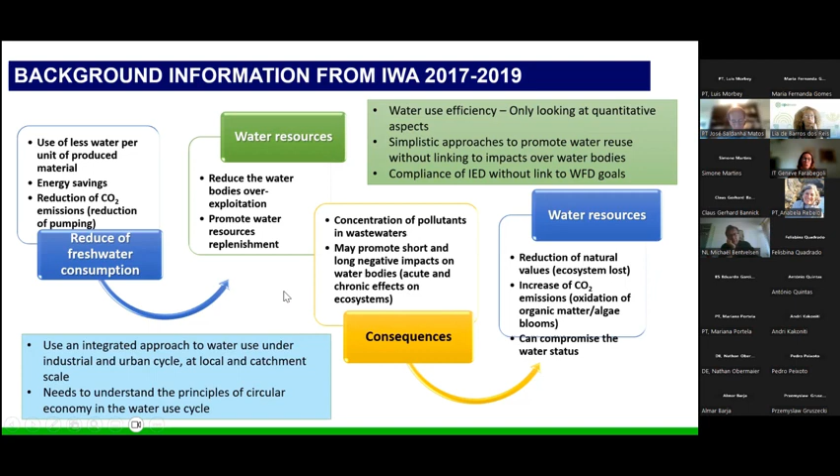So we tried to understand this principle of circular economy, and we tried to focus on water circularity with another approach, not the classic approach focused on water use efficiency and quantitative aspects only, through reduction of consumption and losses, rainwater recovery, for example, or the use of sludge from wastewater treatment plants as a source of organic matter and nutrients and for energy production.

But we tried to take a different, integrated approach to achieve a real transition, because both factors cannot be seen as individual indicators, but should be linked with several possible processes. So water has to be seen as a service, a source of energy, and a carrier.

So what we have done is try to develop this index that can measure the efforts of an installation or a process to move towards circularity. And how to develop this index was the first question.

So in a way that could be smart criteria, we tried to consider key factors, some easy, accessible, and measurable factors that can take into account the relationship between water use patterns, process, and environment. SMART criteria: S for specific, M for measurable, A for achievable, R for relevant, and T for time bound. So especially we tried to develop this index to be easy, measurable, and consistent with available data, closely connected with inputs, output, and outcome, and especially with a specific time frame.

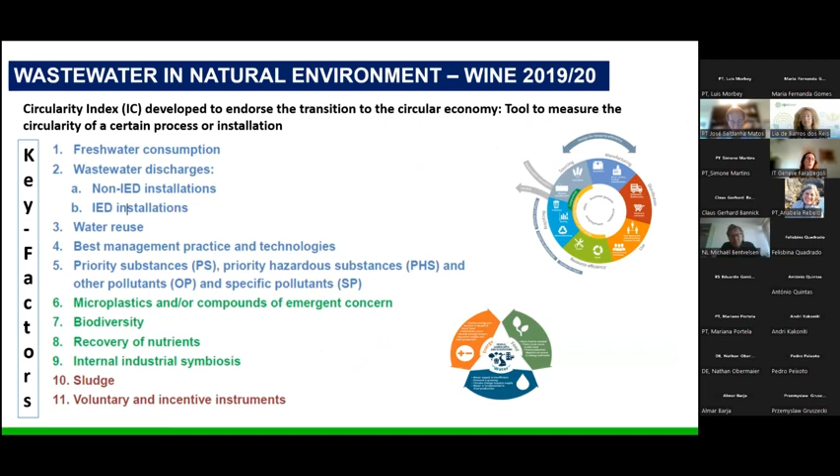For example, the first one, freshwater consumption, or the third one, water reuse, or the sixth or seventh, biodiversity. Here you can see in each part of this cycle that can start wherever, from wastewater treatment to water reuse, for water treatment according to urban use, agriculture, industry use, wastewater, and so on.

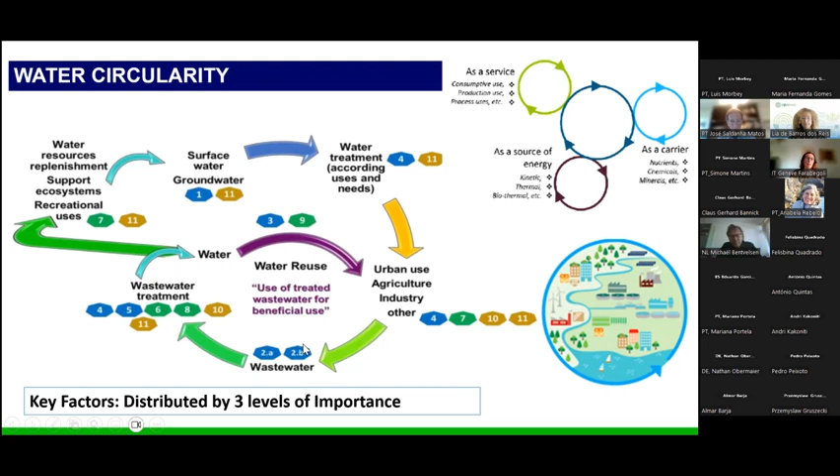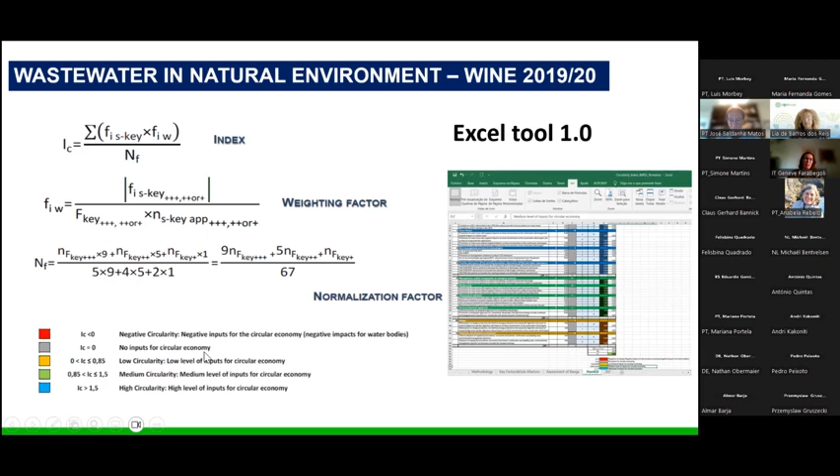If you obtain it, there is a scale of color, very simple to understand. If you obtain a negative circularity, you get a red color index, so negative inputs for the circular economy - you have to improve, of course. If you have, for example, the orange color, you have low circularity, and green is medium, and blue is high circularity. So for IC, the circularity index is below 0 for negative, from 0 to 0.85 for low, from 0.85 to 1.5 for medium, and then high circularity for above 1.5. So which are these key factors?

You have already seen the key factors, but we also decided to consider the sub-key factors and their impacts, which can be positive or negative. So for each key factor, there is a value: 9 for the high importance key factor, 5 for medium, and 1 for low importance key factor.

And for each sub-key factor, here you can see the different values that could be positive or negative according to the impacts. For example, just to look at one of them, freshwater consumption: if you have measures in place to reduce consumption, but without linking the impacts on the quality of wastewater, or it contributes directly to its degradation, the impact should be negative. But if you have measures to reduce consumption with the possibility to reduce the effects of effluent concentration, that's positive - you have a positive impact.

So here we consider, for IED or non-IED installations, all these key factors - microplastics, biodiversity, recovery of nutrients, but also sludge and voluntary incentive instruments such as Ecolabel, for example, certification.

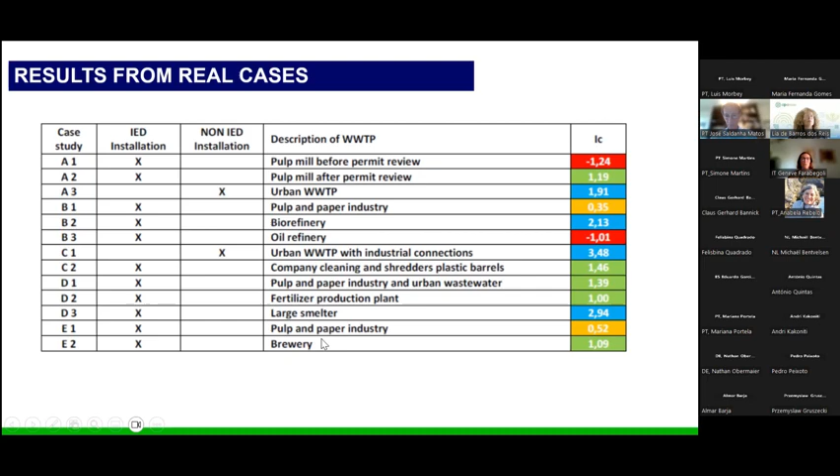So we have got a lot of results from this application of the circularity index, and especially if you see the water circularity index and the urban wastewater treatment plant, applying this index we can understand some important interlinks, such as the compliance of emission limit values defined according to the Water Framework Directive principles. That is very important, not just simple flat values defined by current legislation - that is also the case in Italy, unfortunately.

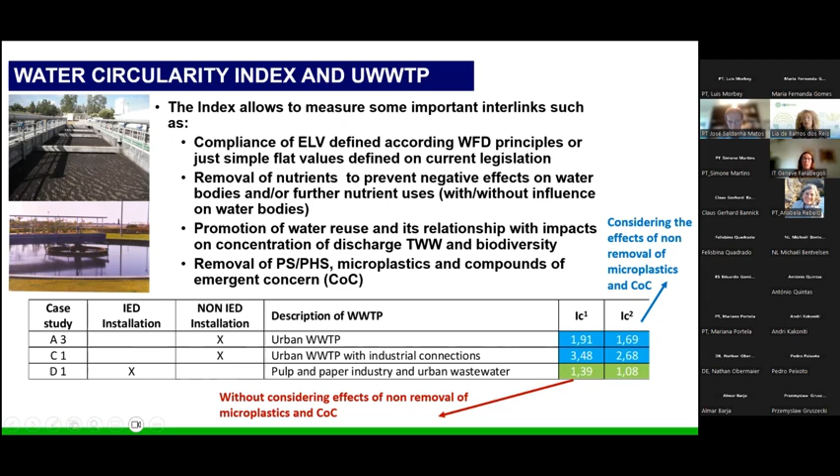Also the importance of the removal of nutrients to prevent negative effects on water bodies, and promotion of water reuse and its relationship with impacts on concentration of discharge. Considering the urban wastewater treatment plant, we also tried to see the effect of considering the removal of microplastics and compounds of emergent concern. We noticed that the circularity index didn't change a lot, just a little bit lower, but not so much. So in this way, we could assess the main positive and negative key factors and impacts of the application of the circularity index.

We noticed that if you have emission limit value compliance according to the Water Framework Directive, you have a positive impact. If you have promotion of water reuse with positive impacts on biodiversity, that's positive, but if you have promotion of water reuse with negative impacts on final concentration due to, for example, concentration of the discharge, you have a negative impact.

So in this way, we moved during the last phase of this project to try to apply this circularity index to different kinds of facilities, moving from the production to the product, from installations to some regional local activities. We focused on three different kinds of activities: a critical activity, as mentioned before, such as a refinery or a pulp and paper mill; regional local activities that could have significant impact in terms of water use, for example a seasonal activity with high discharge loads and high water consumption; and a food production activity that uses or intends to use treated wastewater for irrigation or sludge.

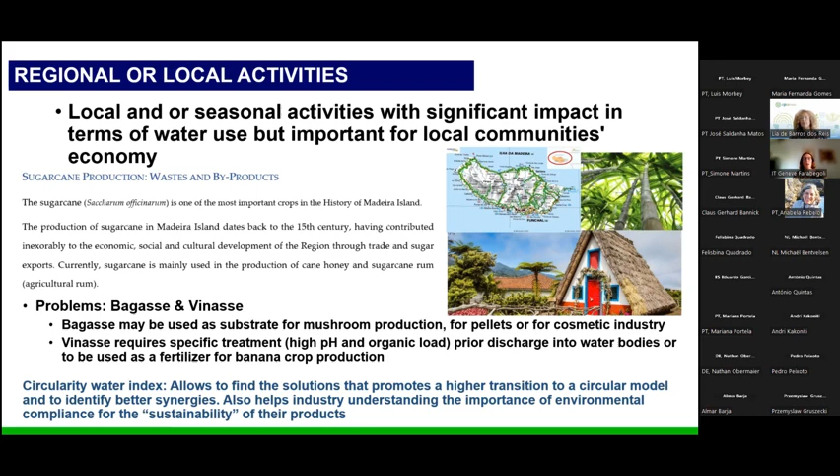So we tried to use this circularity water index to find solutions that can promote transition to a circular model, and to identify synergies, and try to help the industry understand the importance of environmental compliance for the sustainability of their products. The second site visit, we did in Murcia, Spain, and it was about the use of urban wastewater for crop irrigation.

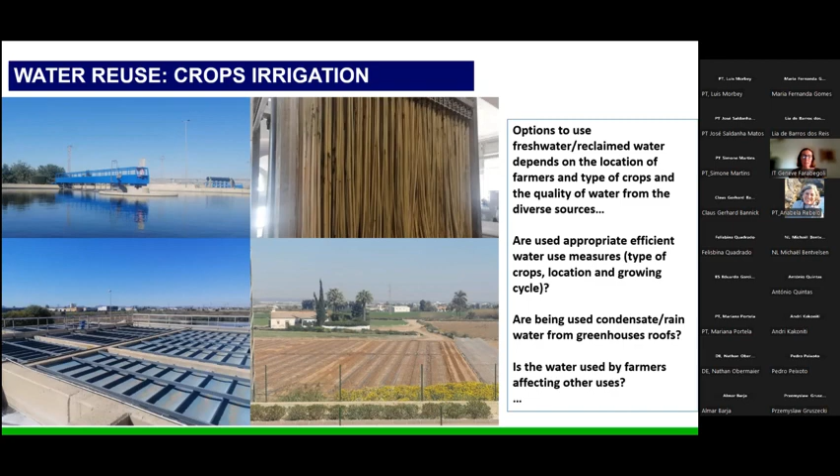So the final remarks of this project are that the index allows the assessment of the impact of the integrated approach to water use, and it confirms the promotion of water circularity depends on the management option chosen. The application to IED or non-IED installations and water reuse solutions enables the cumulative impact of efficient water use to be assessed both in terms of quality and quantity.

So this index can, or should be, refined to include some energy aspects and further integrate impacts on CO2 emissions. That's an aspect we have to focus on a little bit more. But the definition of factors applicable at the final product level could support the adoption of best practice in water use, with relevance to regional and seasonal products, as we have seen in the case of Madeira. This can be considered an indicator that promotes integrated compliance with environmental legislation.

For more information about this project, you can see the link to the IMPAL website, where you can download all the reports available, in English, Italian, and also Portuguese. So this was our last question: can this index become a label? We don't know. Let's see. Thank you for your attention.

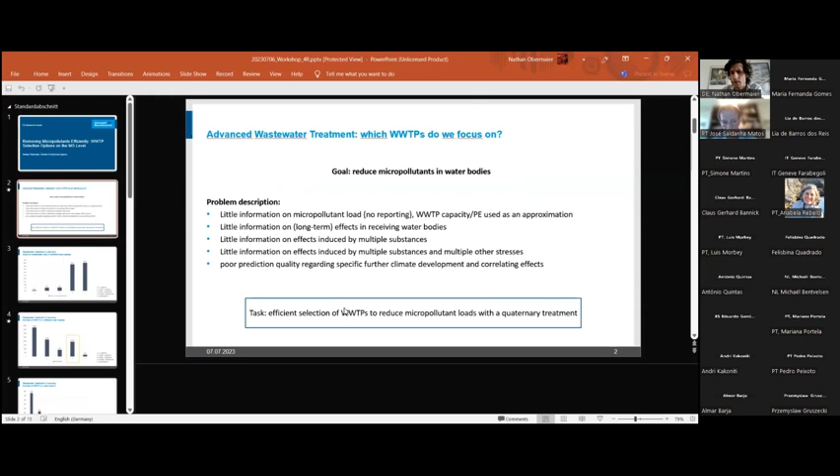Do you see the new slide now or still the old one? It's the old one still. Okay, can you put it in slideshow mode? Maybe it's better. No, it's not better. I'm just going to share my whole screen, I think that usually solves the issue. Okay, if I switch now, do you see it? Yes, now it's okay, it's good. So okay, now it's good. Yeah, we got that sorted out.

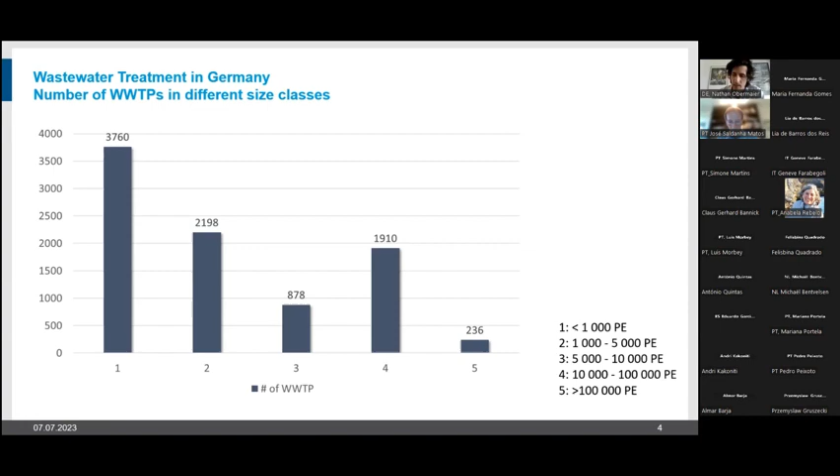If you come back to the question, which wastewater treatment plants do we focus on? We, the German Environment Agency, published a position paper in 2015 where we stated it would be good to equip all wastewater treatment plants with more than 100,000 PE with a quaternary treatment, and also plants that discharge into sensitive water bodies. In our definition, sensitive water bodies were water bodies also used for different purposes, like bathing water, drinking water, irrigation, and so on. So that was our proposition in 2015.

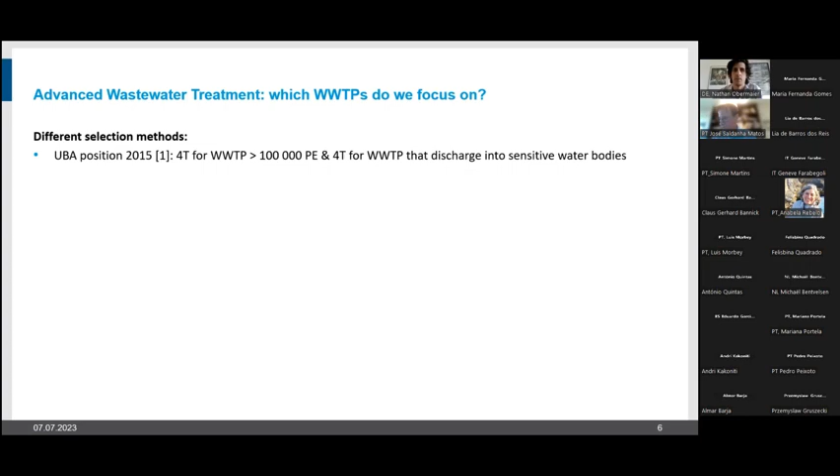In 2016 in Germany there was the start of the so-called trace substance dialogue, which is basically a synonym for micropollutants in Germany. They developed a guideline in 2019 on how to identify the most relevant plants that should be equipped with a quaternary treatment. We now have the National Water Strategy, a strategy of the German government that continues this trace substance dialogue, with equipping additional wastewater treatment plants with quaternary treatment as one of its measures. It should be added that in Germany we already have around 40 to 50 plants equipped with a quaternary treatment, so we are already heading in that direction.

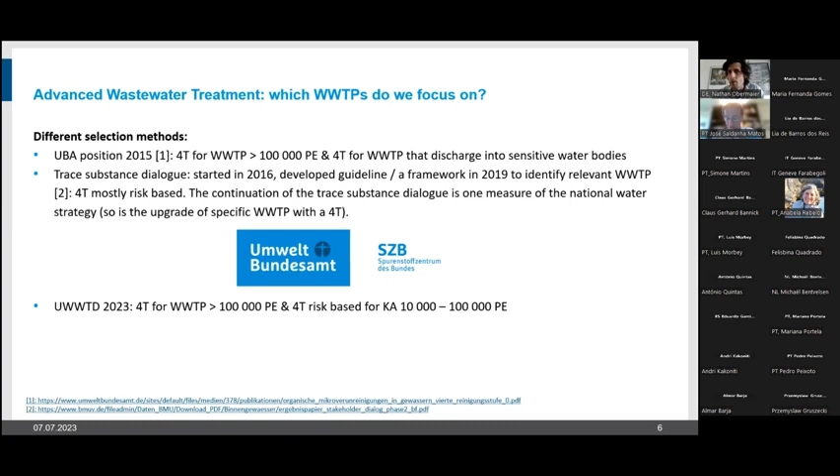The proposal of the European Commission stated that we need quaternary treatment for all plants over 100,000 PE, and a risk-based assessment for plants between 10,000 and 100,000 PE. So just to give you a quick look at the guideline, because I think it's important to realize how we select plants and how that approach looks - we also had that introduction that we need a multi-criteria analysis, and we have that risk aspect.

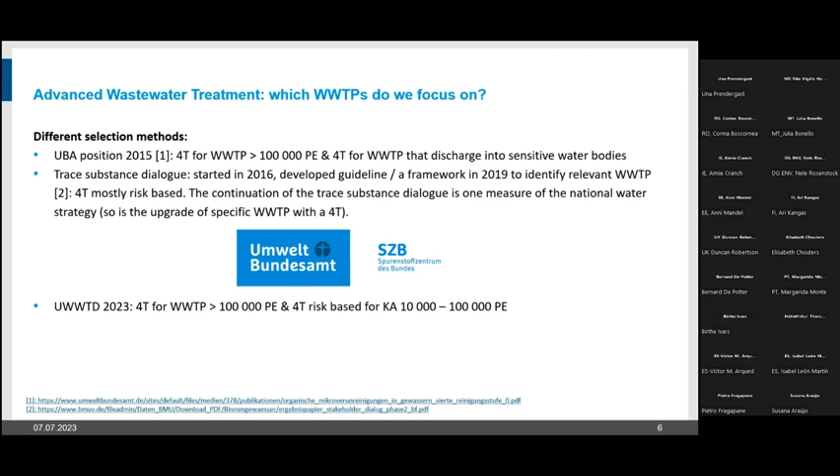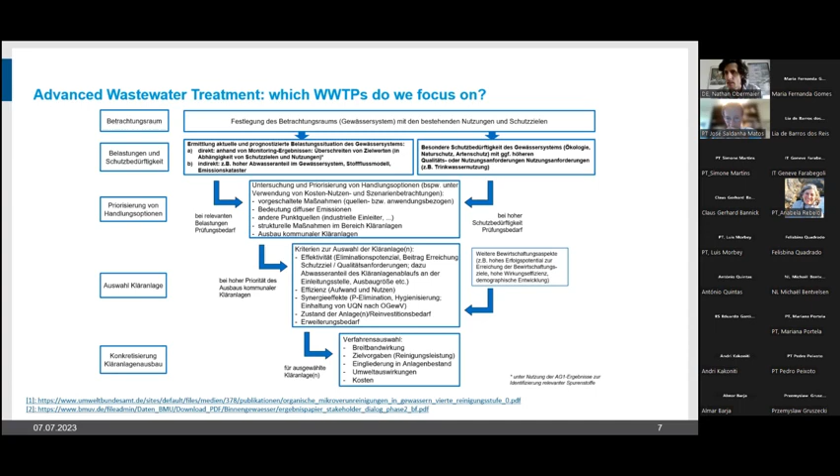So I thought it would be a good idea to show it quickly how it looks. It's unfortunately in German, but if you have any detailed questions, we can try to give you a more detailed translation.

I basically translated the key points on how to assess which plants to equip with a quaternary treatment. This all starts with the scope, where you define the water body you want to select, and you set goals for that water body based on its use. For example, we have one goal for the River Rhine: reduction of micropollutants by 30% until 2040.

Next, you assess the pollution stress and the vulnerability. This is doable in various ways. You can directly measure the pollution stress, or indirectly model it, or do a combination of both, verifying your models with measurements. If you look at vulnerability, you have ecology, drinking water abstraction, bathing water, irrigation, the ones I've mentioned before.

The next step is to prioritize measures. We have scenarios, cost-benefit analyses, and we check what kind of pollution we have—if it's a diffuse source or a point source, and if measures on wastewater treatment plants are helpful or not.

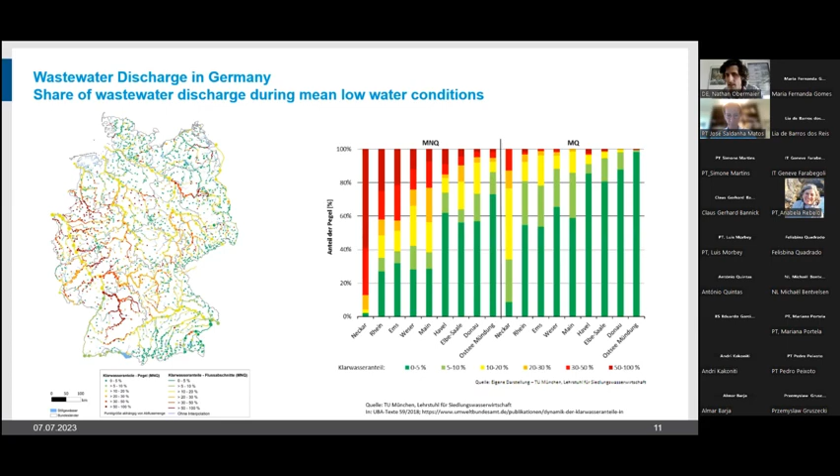So we know we have several rivers where the share of wastewater during mean low water conditions is above 50%, and some measuring stations where it's higher than 90%—so almost all the river is treated wastewater. That, of course, influences how important quaternary treatment will be, and it influences the selection process, as it's a key criteria for selecting plants. I've posted it here again for the different river basins and systems in Germany.

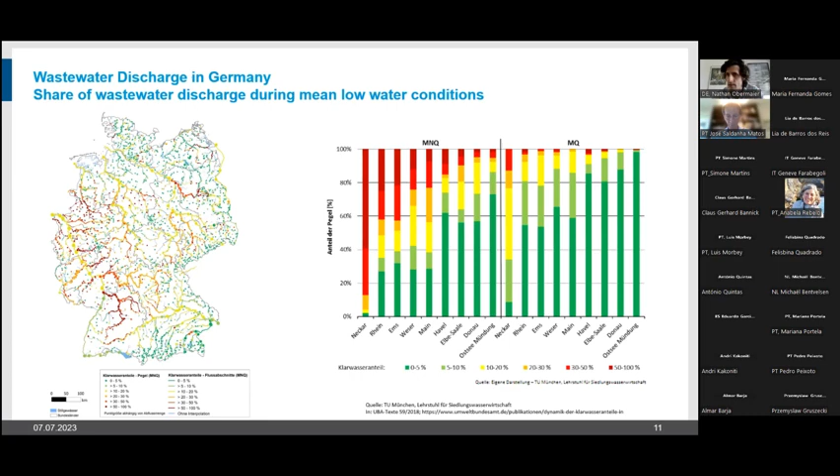You can see that it's not just a single case, but almost in every river you have these spots where the river is more wastewater than natural river water. And we also have this time effect.

Here's an example for the River Rhine, where under medium conditions it basically always looks good. You have some points where the share of wastewater is between 20 and 30%, but that really deteriorates during mean low water conditions, where you can see that almost a lot of stations have at least 20 to 30%. So that's quite important to consider if you make a risk assessment, that dilution cannot be based on mean values. You have to take into consideration the mean low water conditions and what's also coming from upstream.

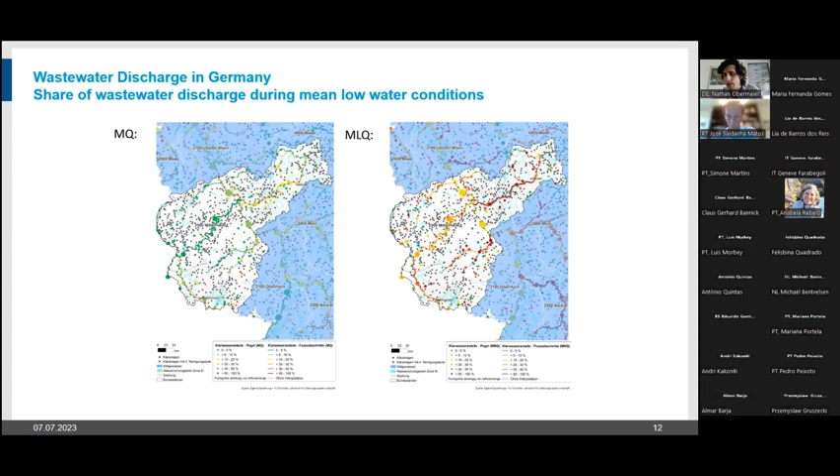So those are really, really difficult assessments you have to take.

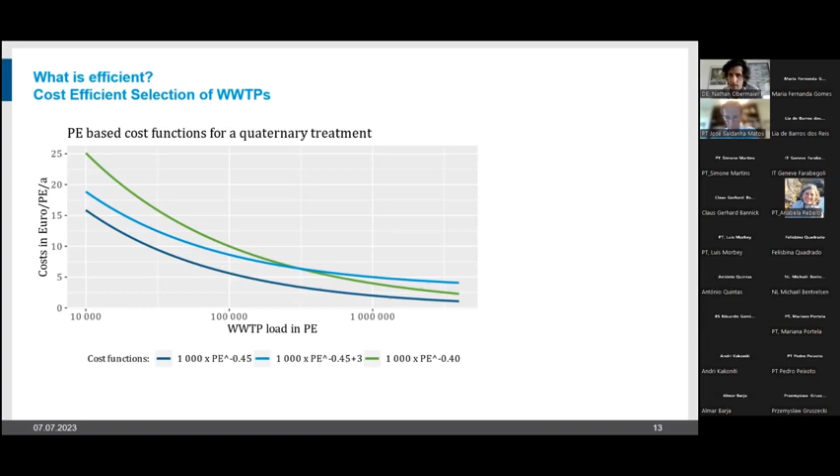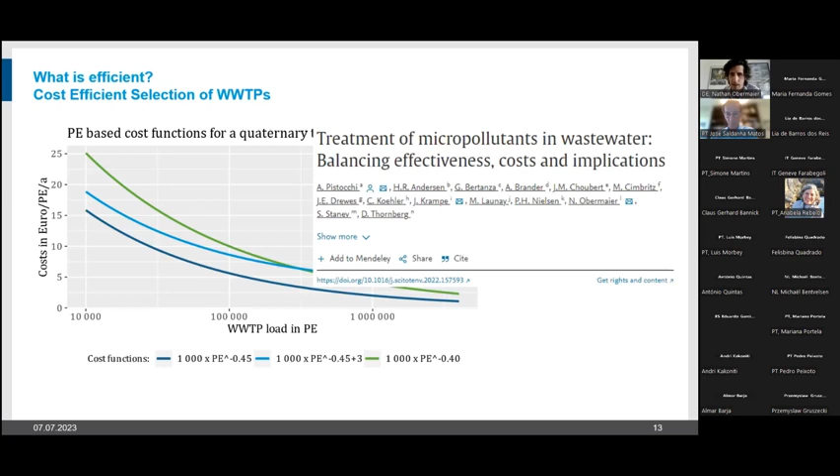The next slide goes into the efficiency criteria, where we have cost functions for quaternary treatment that we also presented in the scientific opinion paper the German Environment Agency wrote on the Urban Wastewater Treatment Directive recast, which shows that the bigger the wastewater treatment plants get, the cheaper it is per capita. If you want to know more about how to derive those curves, I recommend reading the paper, which has a really deep methodical approach. The data certainly has some years now, and due to rising energy prices it might be a bit more expensive now, but nevertheless I think it's quite a good way.

This brings me to the summary and conclusion, and hopefully to a good discussion, where we state that quaternary treatment is mandatory to reduce micropollutant loads, and we need it as a multi-barrier concept. With respect to efficiency, it's certainly quite hard to define if you have to look at several different aspects.

You for sure need a good multi-criteria analysis, you need scenarios, you need modeling, you have to combine them with measurements to be precise. And there are a lot of really high uncertainties with respect to risks. We rather see a risk-based approach as a really complex tool.

And we are happy that there are plans that should introduce a quaternary wastewater treatment step without having to do a risk-based assessment. Last but not least, I want to give a quick commercial break to the scientific opinion paper that I've already mentioned. We wrote it and it discusses more aspects of the Urban Wastewater Treatment Directive in detail.

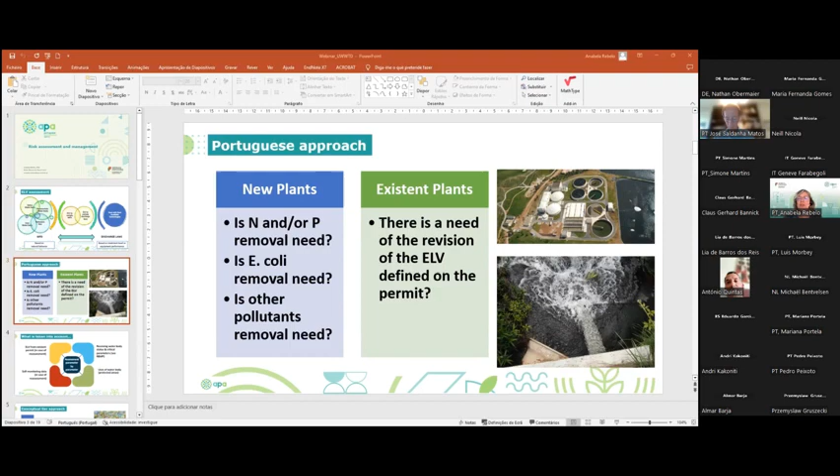For example, for the Industrial Emissions Directive, sometimes we have to go deeper than the associated emission limit values - we've already noticed this need.

So what is taken into account? It's an assessment permit by permit. If we're talking about a reassessment, we look at the permit and all the data we have from self-monitoring, and also data from the water bodies. We look at the receiving water bodies and the critical parameters for their status, their uses, and the classification of those areas as protected areas under WFD.

So basically, we use a conceptual tier approach - it's not modeling, just conceptual models. We look at the hazards, which are the pollutants that may be in the wastewaters, then we look at the vulnerability of the receiving water bodies - their susceptibility to pollution - and finally the damage. If I have that damage and susceptibility to pollution, I have the consequence. The consequence versus the hazard gives me a risk.

So basically, I use this kind of methodology to define appropriate emission limit values, measures for the self-monitoring program, and also for compliance assessment. The self-monitoring may include water body monitoring.

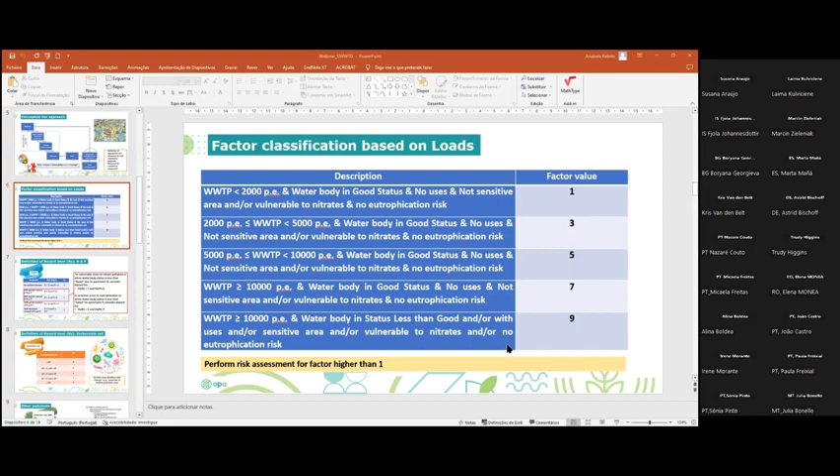We started with the hazards, and for the hazards, we use proposed emission limit values as input data. For example, for nitrogen and phosphorus, we use the emission limit values from the current Urban Wastewater Treatment Directive, and also from national law, for discharges into dams or fresh waters that feed dams.

In that case, we will have a classification from 1 to 9, a scale of importance. 1 is minor importance, 9 is absolute importance.

And basically, to establish nitrogen and phosphorus values, we take into account not only the status, but also the vulnerability to pollution, to nitrates, and the status - whether it's good or less than good - due to nitrogen and/or phosphorus.

Then another type of parameter is Escherichia coli. Why? We have a lot of bathing waters, but we also have a lot of shellfish waters - we are large producers of clams. So we have this classification under criterion C, under the directive.

In this case, it's always a case by case assessment according to member state rules, so we define the Escherichia coli emission limit values based on this approach.

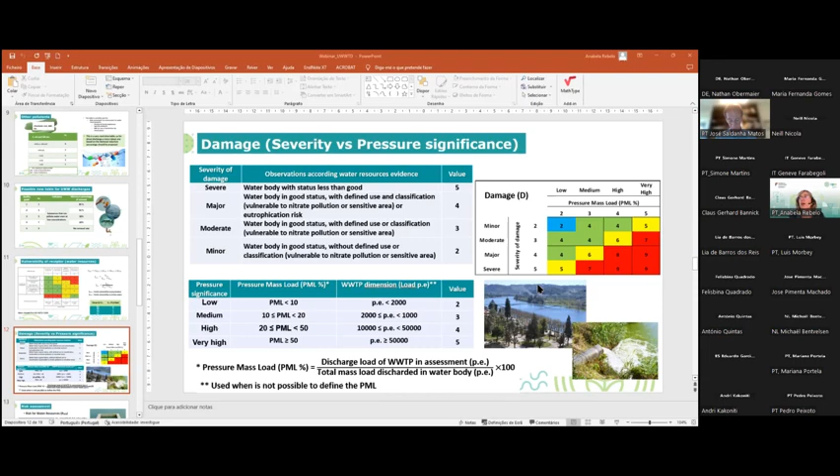And based on this kind of pressure versus severity, we put it on a matrix and we have a damage. After damage, so I have hazard, I have vulnerability, I have damage, I have a risk. So normalized to the maximum scale level of my importance scale, 9, and I will have 3 levels of risk. So it's a very simple conceptual model, but that can integrate complex data, okay?

So basically, if it's high, I need to do a reassessment and decrease my emission limit value. If it's moderate, I need to get a deeper look. I need to understand, do I need to go deeper on the emission limit value?

Or for example, I'm not in a river where the mixture with wastewaters is not so high, or the dilution is not due only to other wastewaters, but I am in a coastal water. So I may look into more detail and based on this define to reassess for the lower emission limit value.

Or to reassess to define more critical measures for risk management. Like, for example, monitoring, specific criteria for seasonality, or even to define for severe weather conditions, like, for example, severe drought conditions. So I can look at that into more detail.

But if I'm at a low risk, my hazard, my level of input for hazard is a good emission limit value, and so it could be accepted without more restrictive measures.

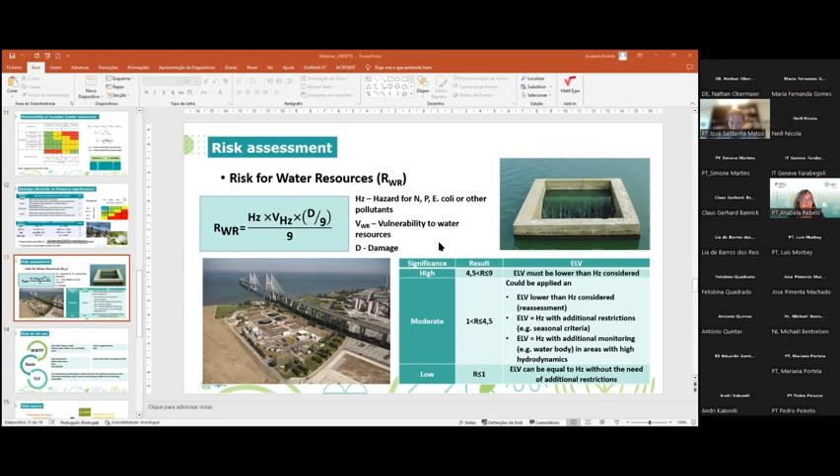So how do we use it? We use it for new plants before design, ideally, or before retrofitting planning project. We also use it to find out if we need to reassess the permit and the emission limit values that are included in that permit.

So basically, we use this methodology to define best emission limit values and additional measures, like, for example, more restrictive monitoring of water bodies, or even seasonal criteria.

And as a data source, we may use data from river basin management plans, the permitting process, but we can also use other data sources, like, for example, the E-PRTR, or even research studies. Research studies are very useful, for example, to have information on micropollutants. So we try to use as much as possible the majority of data that we have.

And let's see an example. So let's look at an agglomeration. Capacity load 51,000 population equivalent. I have a treatment plant in the same range, but with a higher capacity load treatment. It's a secondary plus UV disinfection.

In terms of the water body, it's classified as sensitive, criterion C, due to the shellfish production sites. And the status of the water body according to WFD is good status. So I will look at the annual load of the treatment plant versus the total mass load of the water body.